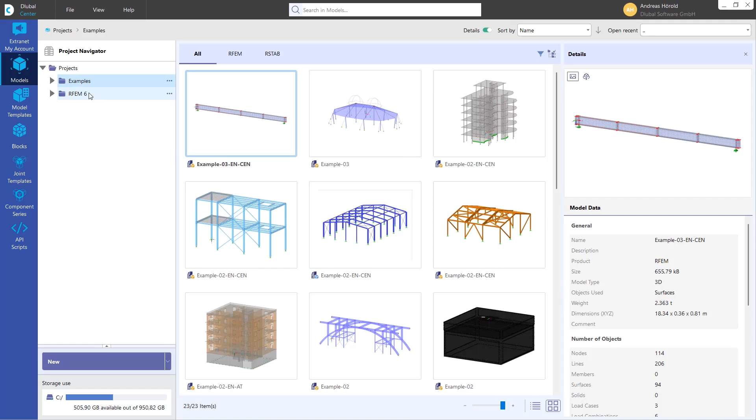People who already work with RFEM 6 know that. I would like to give you some tips and an overview of how you can work with the Dlubal Center, and news on what we've implemented in the Dlubal Center.

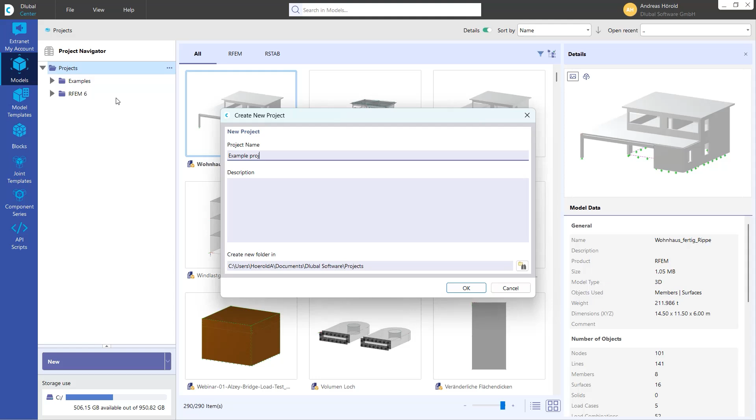Let's start with the models, the most important tool in the Dlubal Center to organize your projects. Let's create a new project with a right click to projects, then create new project. Let's call it example project. Okay, that's the new project.

I would like to create a sub-project. Again, right-click to example project, then create new project, and the new project should be model house 1. I can add a description here if I want.

Again, a right-click to model house, and I create a new file, RFEM model in that case, and I call it house variant 1.

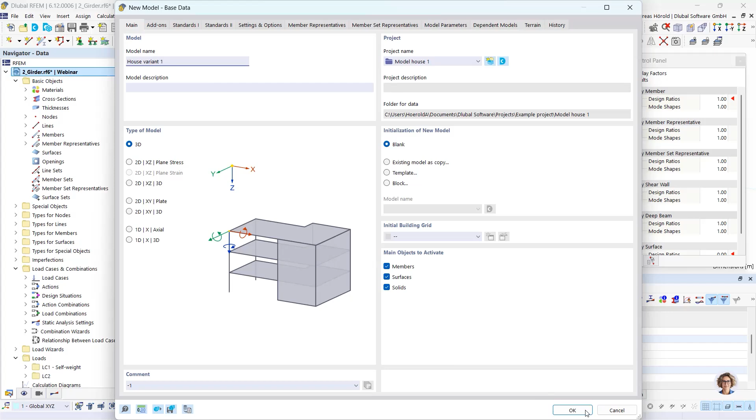Turn back to the Dlubal Center. Then you can see the file here. If you switch to the list view, you can add different columns here. For example, created in version, created by user, or I can remove them with a double click, and can add used add-ons, modified by company, or created by company as you want. Different types are available, and now you can see the added columns here.

Then I can open, for example for the example project, with a right click, the folder location, and the Windows Explorer opens. I can create a new folder also here. So with a right click, new folder, and I call it model house 2. I'll decrease it a little bit so we can see both.

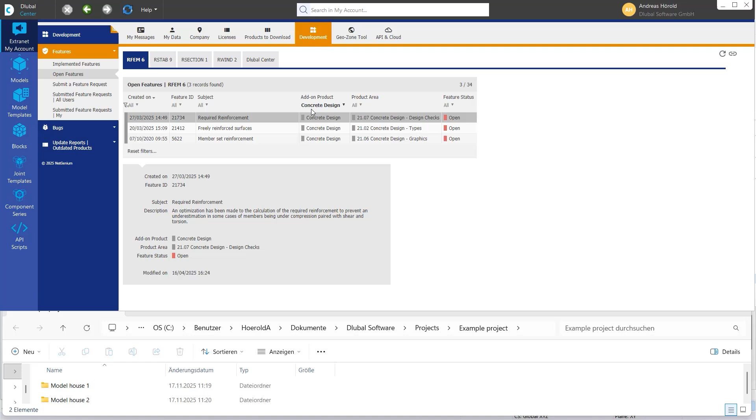Let's turn to the extranet and my account. You can see the extranet messages here, or what's quite important, the development. You can see implemented features in a certain add-on, for example, or you can select all to see all implemented features. You can see open features for certain products or all products, then submit a feature request, and maybe it will be implemented in the future.

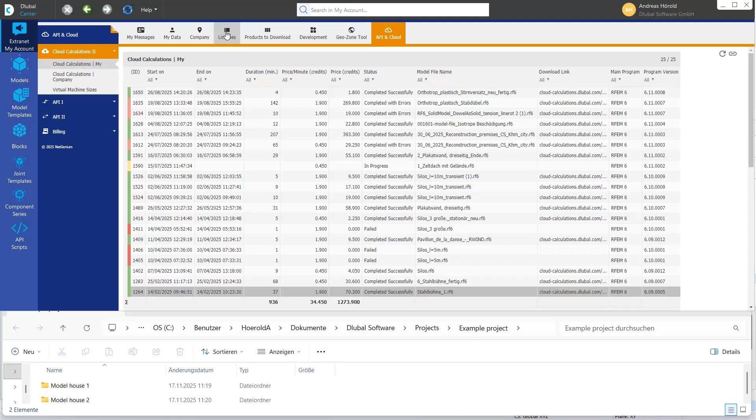For example, you can see the GeoZone tool requests - those are my requests in the past. Then the API and cloud - those are calculations from my side from the past. Then you can see here the data of you and of the company, your licenses, and so on.

Then we turn to the model templates. The model templates category in the Dlubal Center provides an overview of the models you have saved as template files. In my case, it's empty. An important message: the save as template function in the file menu in RFEM allows you to save your current model as a template.

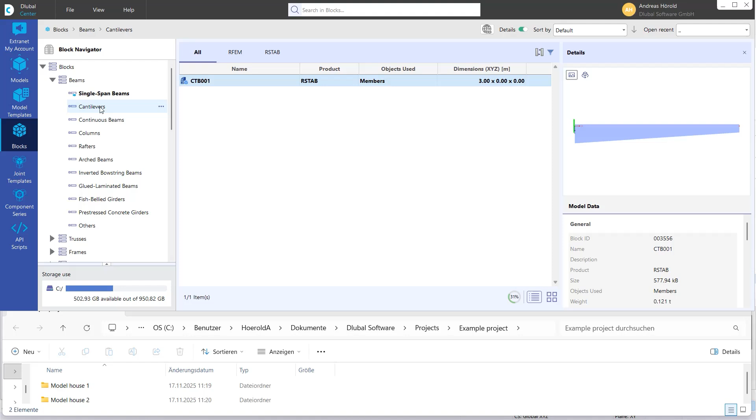Then you can see the blocks. Those are parameterized, and most of the models have parameters implemented. Let's go to this view, the tiles.

Simple models and more complex models, for example curved surfaces and concrete structures - a lot of blocks are available. Just use them, that's quite easy to handle.

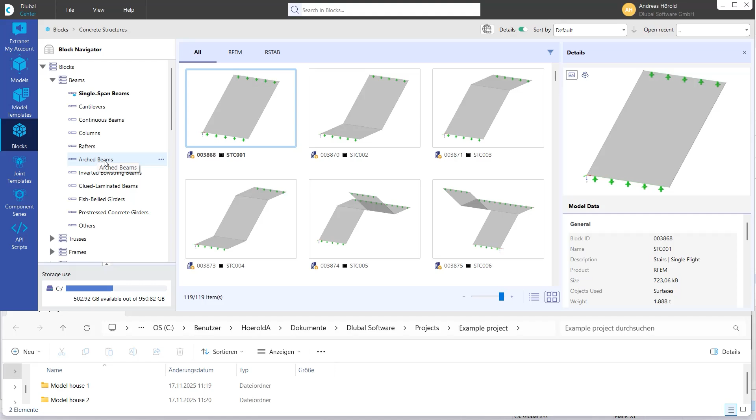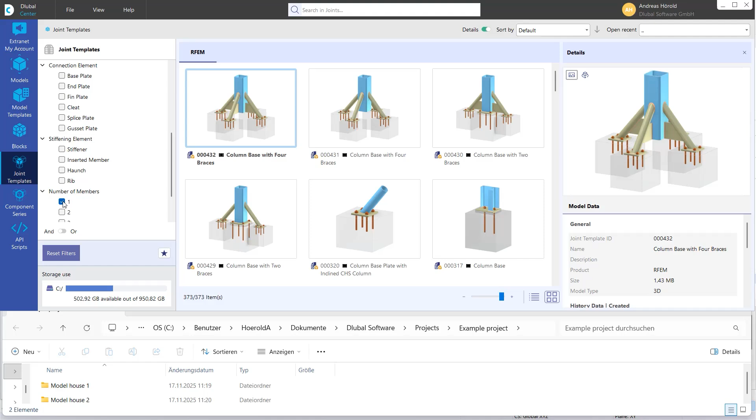Then the joint templates - you can select certain templates of joints. You can use it in the add-on, also in the steel joints add-on, for example number of members or joints with ribs, cleat, and so on.

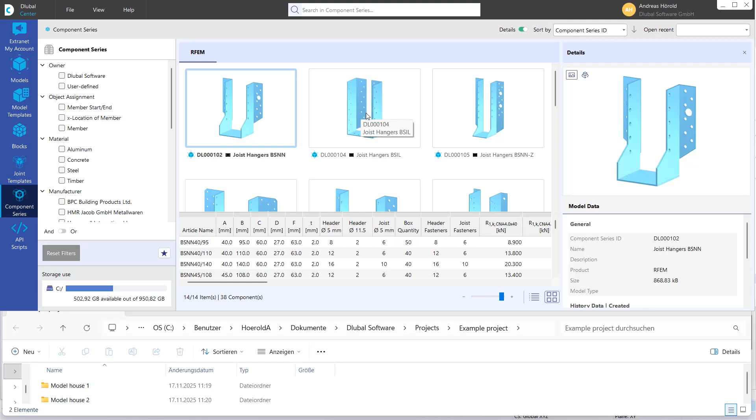Then that's a quite new part of the Dlubal Center, the component series. We are in the development of the new add-on components. It's currently in alpha version, meaning it's in preparation, and in the future you can use the values of such joints and compare them - you can compare your internal forces with the maximum forces of the joint.

And API scripts - there are already sample scripts that you can also use for your project. Okay, that should be all for this question. Let's turn back to RFEM.

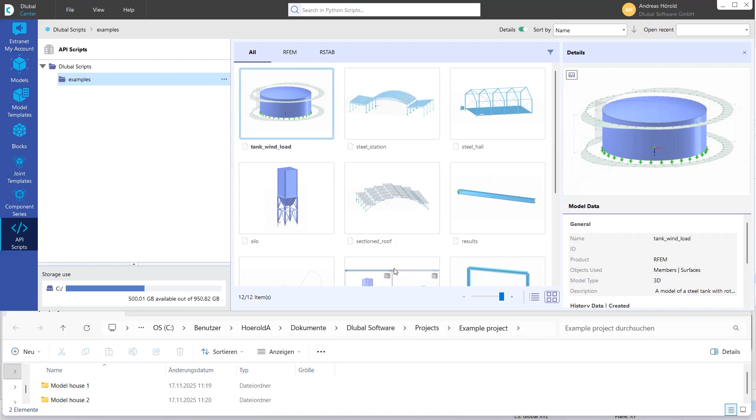The next question is: can I design longitudinal fillet welds according to Eurocode 3, part 1-8, in RFEM 6? Yes, that's possible now, soon we release that feature, and I can show you how to do that. I've prepared a simple single span beam here made of a cross section HE 180A.

Imagine you need to use a girder with a maximum height of 175 millimeters. It's not possible, as you can see on the design ratio, with the HE 180A, and it's also not possible with an HE 180B. That's why we create a welded cross section.

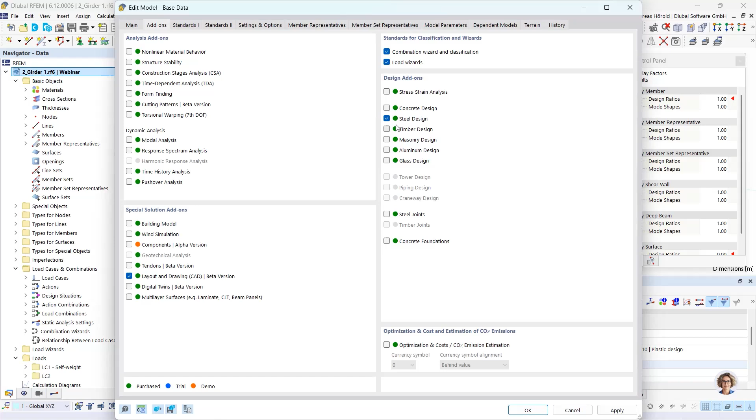At first, it's clear - I go back to the base data. It's necessary to activate the steel design for that feature. Then we create the welded section. I edit this used section. I turn to the library above and I select thin-walled I section.

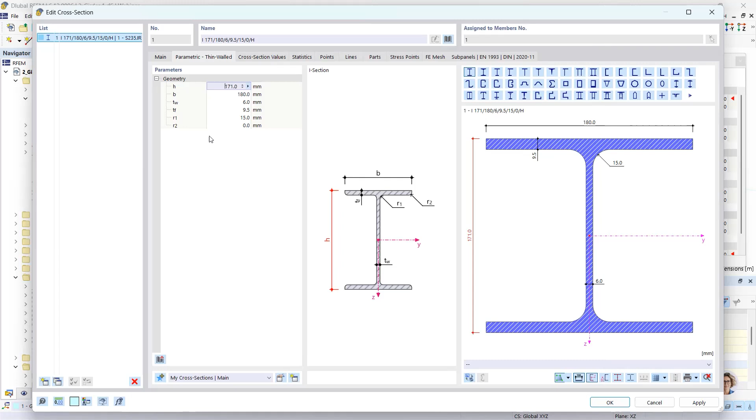Before I enter the geometry, I go back to the main section here and I select welded. Then I enter the parameters - maximum height should be 175 millimeters.

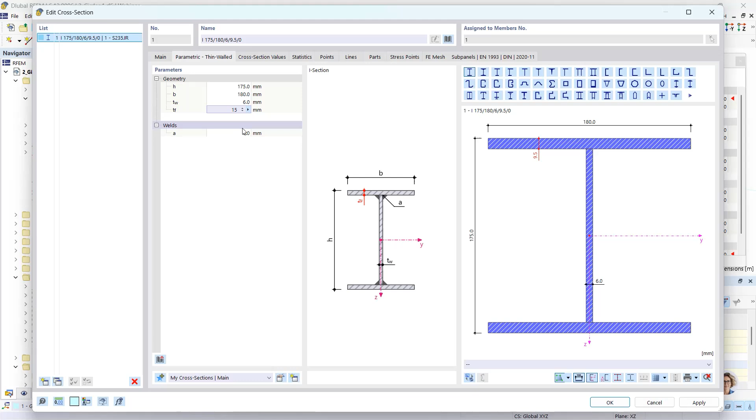Then the other values can remain, but not the thickness of the flange - should be 15 millimeters, and the weld should be 3 millimeters.

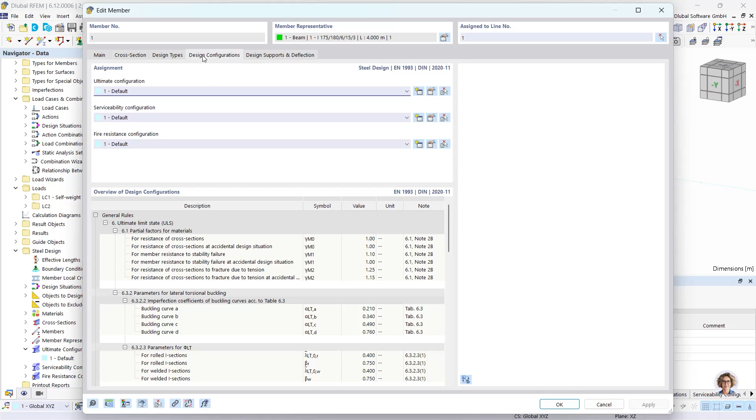Then I have to activate the weld design. I turn to the navigator data, then steel design and the ultimate configurations, default. I can turn to that chapter also when I use a double click on the beam. Then the design properties are activated and I can find the design configuration here, and I can edit it also with that button.

So then I have to activate the design of the longitudinal fillet welds. The correlation factor should be determined according to the Eurocode. It's dependent on the material, and in our case it should be 0.8 because we have material S235. If you want, you can also use a user-defined correlation factor.

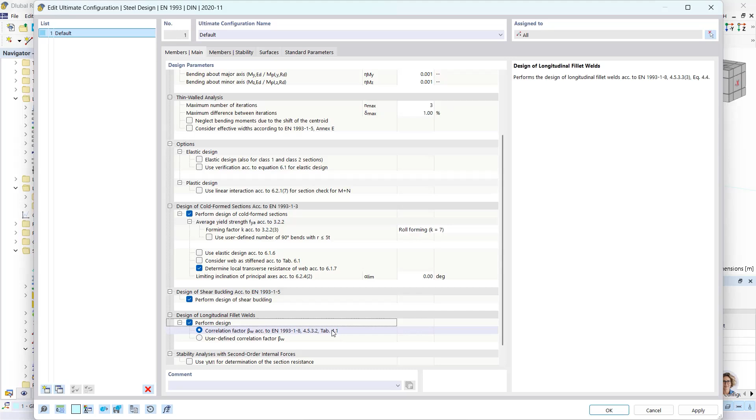In most cases we will use the automatic data determination according to Eurocode. Okay, so then I start the steel design again.

So the combinations are calculated in parallel. Let's turn to the design ratios on members. Yeah, and you can see there's an error.

If I double click on the line, the details are opened and you can see the throat thickness of one or more longitudinal fillet welds is smaller than the limit according to Eurocode 3.

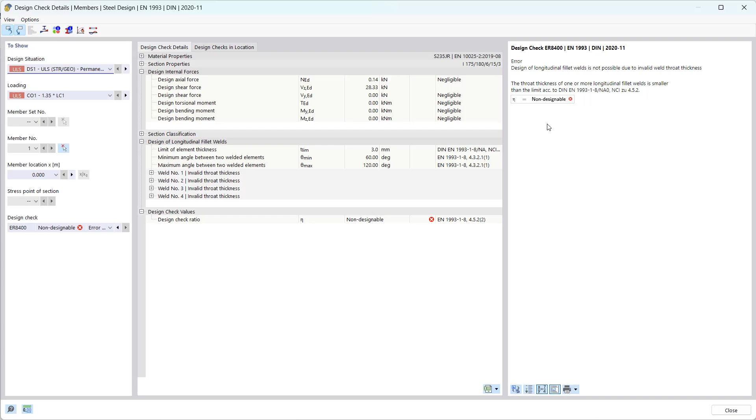Now the program checks that automatically. In that case, the weld is too small, and we need to increase the weld. So I turn back to the navigator data, double click on the cross section, and increase the weld to 4 millimeters. Then I run the steel design again.

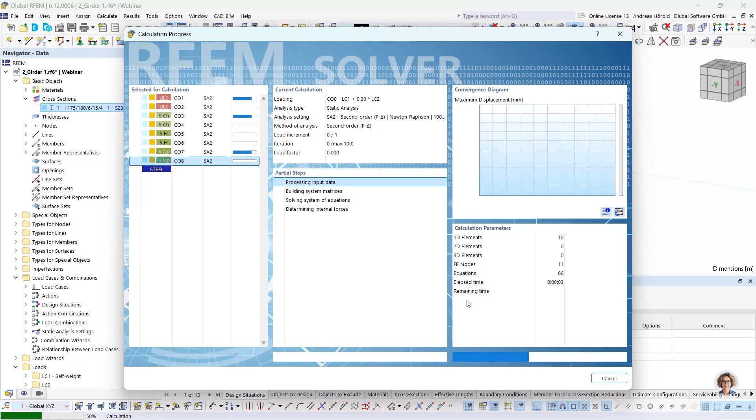So now the design of the weld is done. Double click on it and I can see the design checks. The 0.8 correlation factor can be found here, then the thickness of the weld, and the design check ratio is approximately 30%.

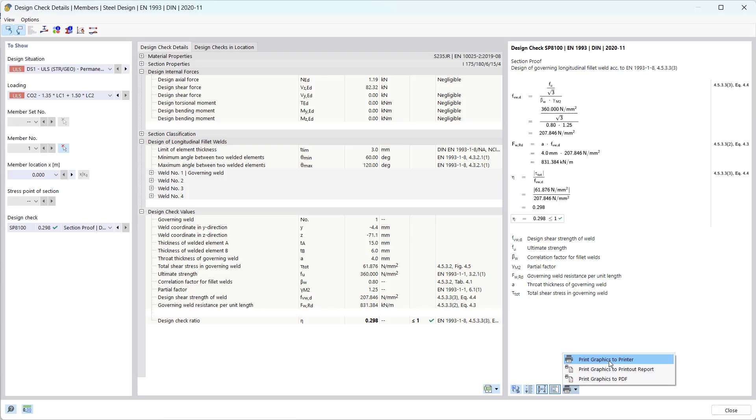And of course you can also print the formulas and so on to the printer or in the printout report. Okay, that should be all to this question and to this model.

The next question is: how can I smooth results in RFEM 6? That's an often asked question. You can do that with a surface results adjustment - in RFEM 5 we called it average region.

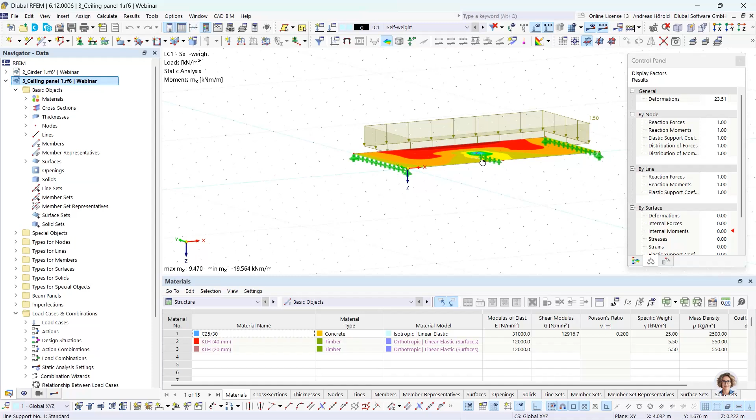Such a surface results adjustment describes an area in the model whose graphical results are not represented by the actual diagrams, but as mean values. You can use a user-defined adjustment area to evaluate the smoothed surface internal forces. You can see that ceiling panel here and a wall here.

Imagine it has a thickness of 20 centimeters, and you can see there are singularities at the end of the wall here. So we would like to use such a surface results adjustment to smooth the results.

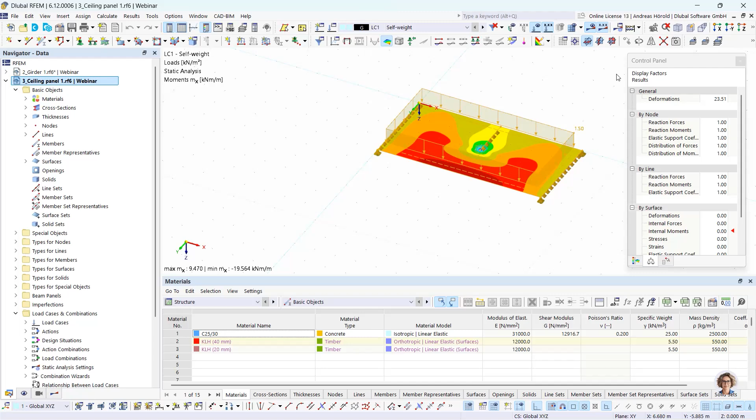So to compare the results, I copy that ceiling panel - select all, then use the move and copy function, create a copy, 6 meters in Y direction, including loading. Okay.

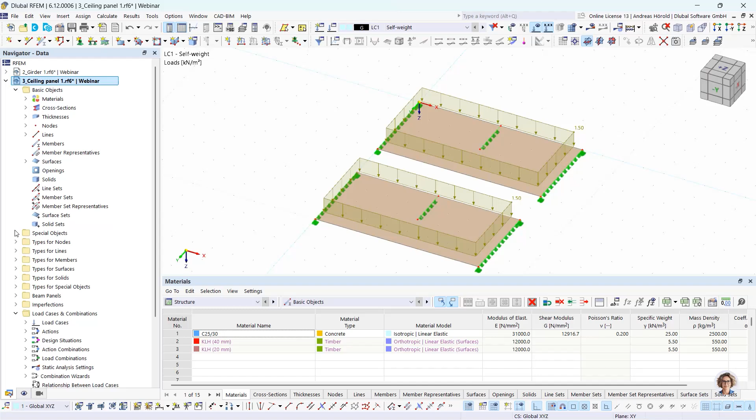So then I turn to the navigator data, and under special objects, you can find the surface results adjustment. You can also find them in the menu under Insert, Special Objects, Surface Results Adjustments, and I open the dialog box. At first, I have to assign a surface.

Then you can select different shapes here: rectangle, circle, ellipse, and polygon. I use rectangle. The dimensions in our case should be 20 by 20 centimeters, and I select the node.

To define the position correctly, I move it to 10 centimeters to depict the wall end correctly. There are different adjustment types. The default setting is for the direction U, averaging of mx, my, mxy, and so on - for basic internal forces in surface direction y. The second line is the default setting for basic internal forces in surface direction x.

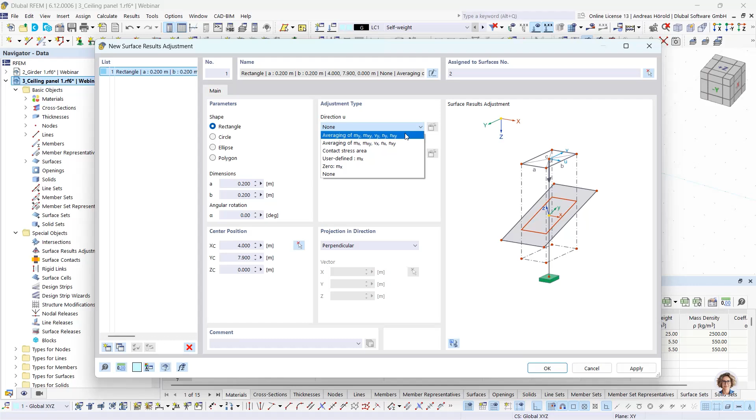So I use the default setting, press OK, and then we calculate all again.

Let's compare the internal forces for both slabs. The maximum value for both is 90.5 or minus 90.5 - the mx internal forces in that case.

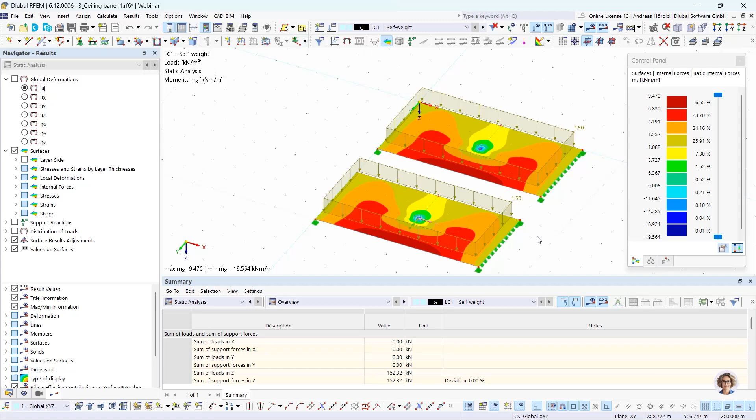If I want to see what the maximum value is here, I can deselect that slab and hide the selected objects. Now the maximum value is minus 16. That's the possibility to smooth results in RFEM 6.

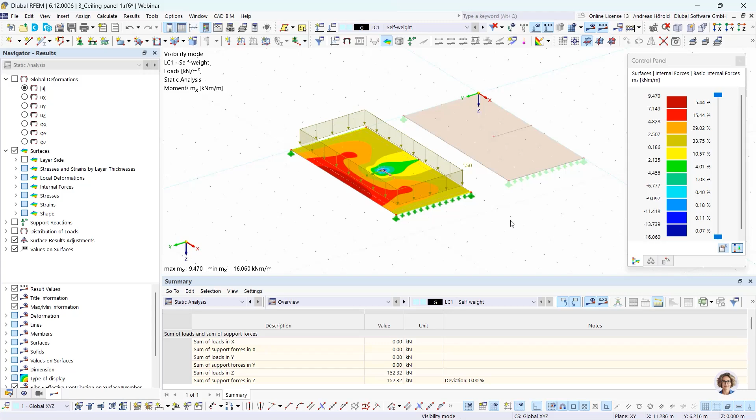Thank you, Andreas. I will continue with the next topic. The next question is: where can I find specific RWIND settings in RFEM 6.12 and later?

As you have maybe already realized, we changed the GUI in RFEM 6 a bit to be able to hand over more data to RWIND directly through the GUI, without stepping directly into RWIND. Let's start with the basics.

Usually at first you activate the add-on wind simulation, and you can choose the standard group for your wind profile in order to determine your automatic wind profile for your region.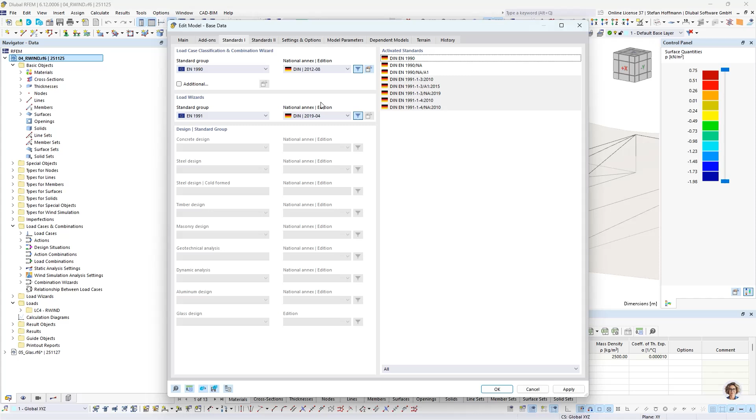If you're interested in adding a terrain to represent the location-specific behavior of the wind, maybe caused by trees or mountains, you can already activate a terrain in the base data terrain settings. You can choose between no terrain, a horizontal plane, an inclined plane, some table values, or - as I am using, and this is most likely also the first change - an IFC file.

Model objects are no longer found in the mesh settings to adjust the IFC as terrain - you now input it as base data in the terrain tab. So I'm simply using an IFC file where I've modeled a simple shape of my terrain, and you can do some more inputs on the size of your terrain already here.

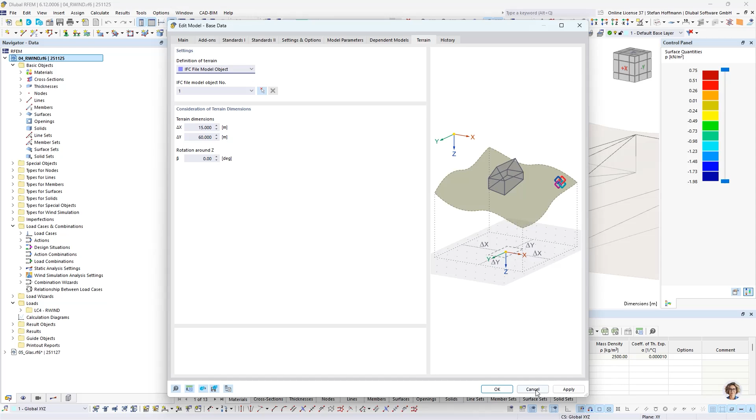If we jump into the model, in the mesh settings you have a tab for wind simulation, and for regular customers you'll realize this tab has changed a lot in the GUI. We moved some parts, and you now have the option to assign objects from shrink wrapping.

The shrink wrapping mesh, which is later necessary for the calculation in RWIND, needs to be assigned to your main structure or surrounding objects. You can already split it in over here, but later on also in the objects - this is currently not in use.

You can also choose to activate the terrain, which we set in the base data, to be considered for the calculation - you can jump into the base data there. You can moreover, as already known, adjust the level of detail for your members, and choose to close hollow sections.

You can consider a surface thickness in general, and the two known options to keep our wind results if the mesh is deleted, and/or to run RWIND in silent mode.

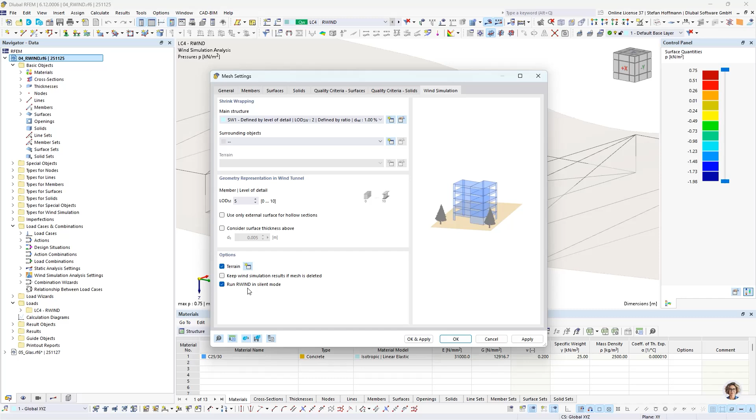As known, you also have settings in the load cases from the analysis type wind simulation. If we jump into the tab, this has not changed a lot - you can assign wind simulation analysis settings, where you can for example differ between steady flow and transient flow.

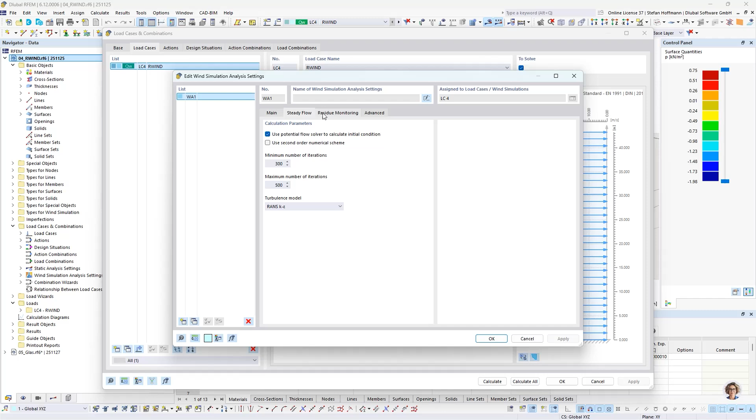You can hit some more options to be handed over to RWIND, and step into the tabs to add more input for the wind tunnel. The wind profile did not change from my point of view, so you can simply assign a wind profile according to a standard and hand this over to RWIND directly. Some more checkboxes at the bottom - everything is usually explained in more detail in our online manual.

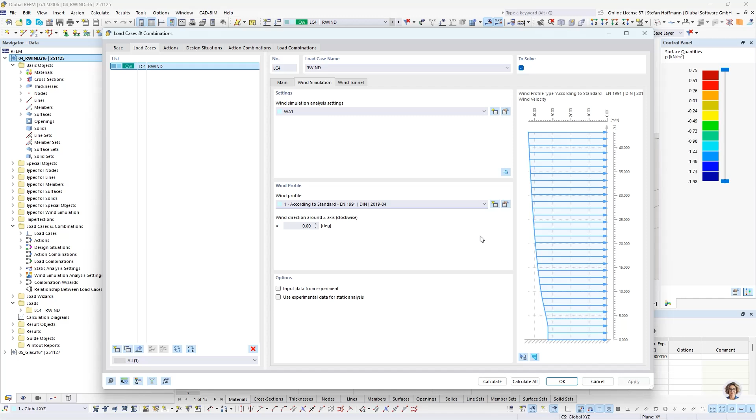The biggest change, in contrast to the mesh settings, is now that every object, if you click, for example, on one surface, has a specific wind simulation setting, which you can activate. And if you see this tab, you can see that you can now assign different shrink wrapping settings for surfaces.

So if you have maybe a small surface, you can assign an even finer mesh later on because you are interested maybe in facade engineering and some results on this point. And if you have a bigger surface, which is not of most interest, you can assign a coarser mesh. You can also define the roughness and permeability as an object.

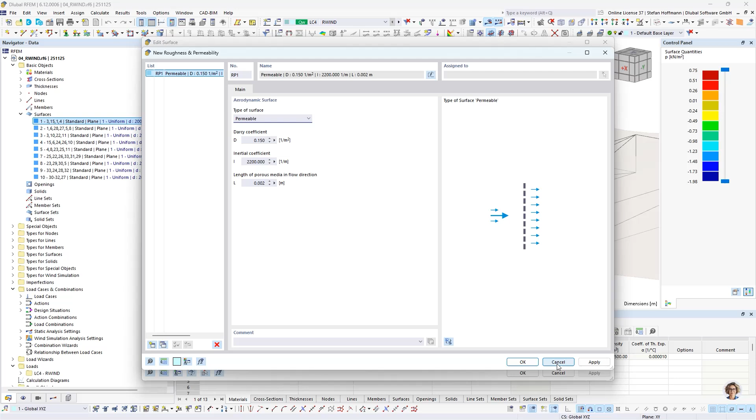So as you are maybe used to already in RWIND, you can use a closed surface and enter some permeable options for it, so that the mesh will not be fine, but it will be considered as permeability later on. You can also check on to consider surface thickness above, and another interesting option is that you can simply also exclude this object from the wind tunnel.

I think what we did not change is that you have, of course, your wind simulation analysis results, and you can still split to show it on the original model and/or the computational model.

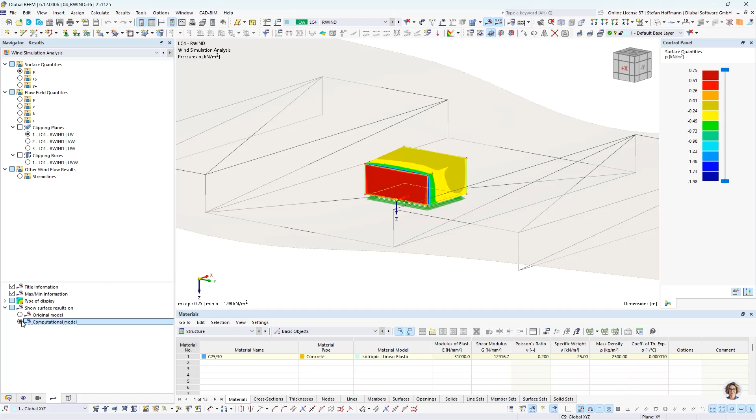We will step to the next question. The next question is, can I control the shear coupling for laminated glass in RFEM 6? So usually, of course, having laminated glass, the shear coupling is quite of interest, because if you have a layered plane where you have two panels of glass and one foil in the middle, then one worst case is that you do not take the shear coupling into

account, having big deformations, having stresses only in the glass panes, but it might also be of interest. That is why we use laminated glass, that you can take into consideration the shear coupling. Sometimes you are allowed to do this. And just with regards to the German standard DIN 18008-1,

it offers two requirements in chapter 7.2.1. It mentions when determining the stress and deformation of laminated glass and laminated safety glass, favorable shear coupling between the individual panes must not be assumed. But in the next chapter, 7.2.2, in the case of an unfavorable shear coupling, e.g. in the case of restrained stresses, full shear coupling must be assumed.

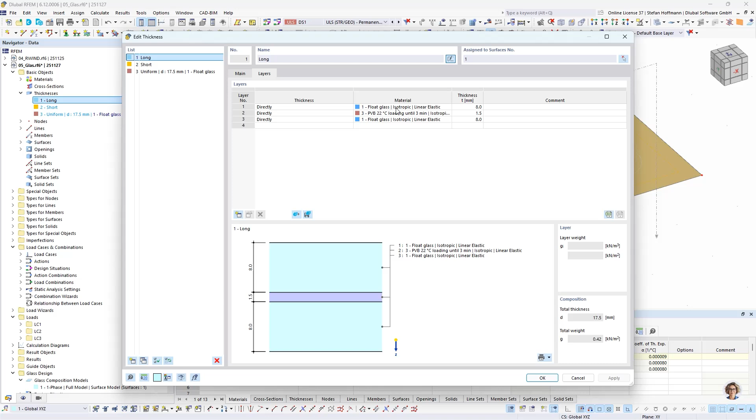So first, a quick look at our model. It's a glass pane with 4 point supports, and I have created a thickness from the type glass composition. I have 3 layers, 2 times float glass, 8 millimeters, and 1 foil in the middle. You can use the foil, of course, with material values from our material library.

I'm using a foil with a load under 3 minutes, so the E modulus will already change for our foil layer. And this is my glass composition. For the calculation, you have to assign, or it usually automatically assigns the first one, a glass composition model, where you can later on also choose a solid model, where you can then take into account also insulated glazing.

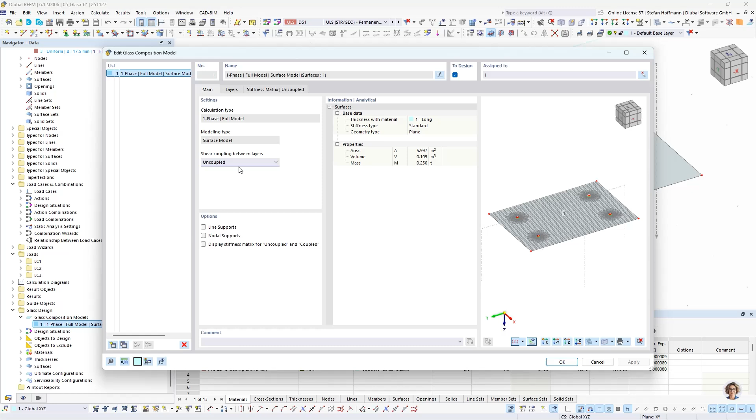But currently you can differ between coupled and uncoupled shear coupling between the glass layers. So I have defined uncoupled, so there is no shear coupling in my main model. So how to consider both shear couplings? It's quite easy in RFEM 6. So we do this checking our design situations.

And once you check glass design, you can see a further added option at the bottom in the design situations. It mentions inverse shear coupling between layers for surfaces with glass compositions. So let's remember, we have a glass composition model without shear coupling. So for every load combination in design situation 1, if we do not check this checkbox, this is uncoupled.

And we can simply copy this design situation and check this checkbox for the same load combinations, where we will then take into consideration the full shear coupling. Just by simply adding an option, load combinations will be calculated automatically.

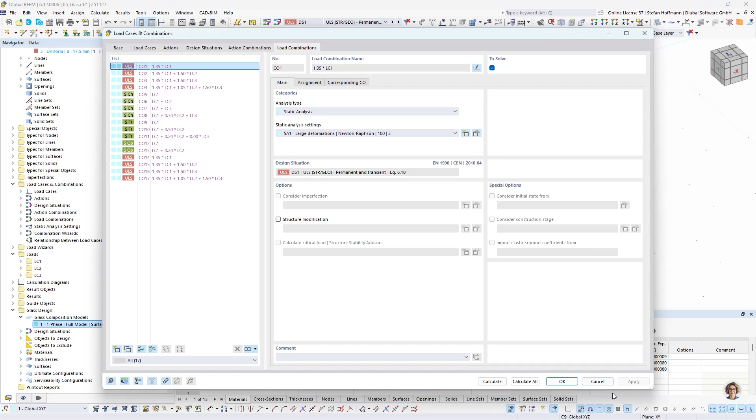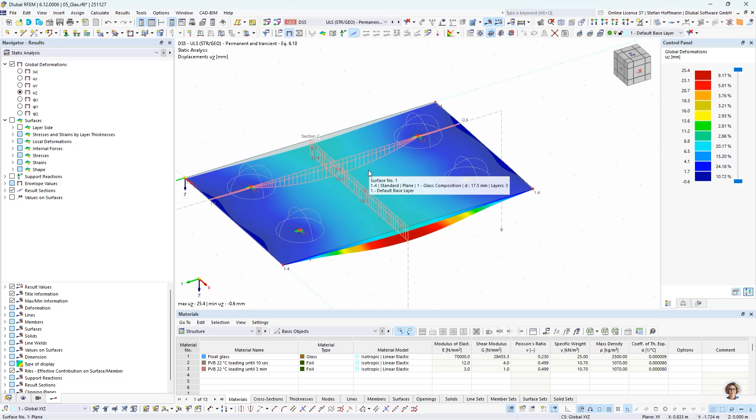So once we step quickly into our design situation 1, no shear coupling, we have a maximum deformation of 50 millimeters approximately. And if we step into the one with full shear coupling, the deformation, of course, reduces as expected, related to the theory behind for our 2D stiffness. And I think the most interesting part is, of course, then later on the glass design.

I have done 2 sections through the model, and we are, of course, above our design ratio, so we would have to adjust our model, but mainly not taking into consideration the shear coupling, we would expect on point supports to have the biggest ratio in the middle of the field, but this would decrease once we can take into consideration the shear coupling.

But this usually affects, most likely, our support points with the point supports, in that the stress ratio may increase. So it's not only in the case of restrained stresses; from my understanding and experience, you can also expect that the stresses may increase with full shear coupling at the place of point supports. You can take this into consideration by simply activating this option in the design situation.

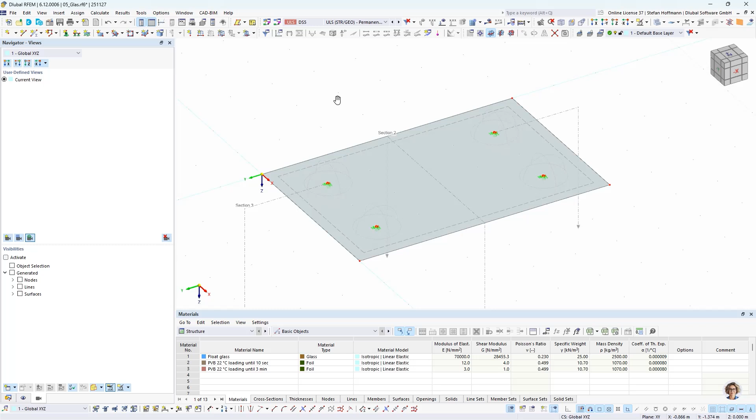Let's step to the last question for today. We will stay in the model. The last question is: my mouse is not working as usual, what can I do? Let's reflect on the mouse function. With the left mouse, you can select items. With the mouse wheel, pressing it down, you can pan. With the right mouse, you usually get a context menu with some options. If you hit Control on the keyboard and press the middle mouse button, then you can rotate.

If you select a node or object beforehand, hit the Alt key and press the middle mouse button, you can rotate around that object. And of course you can move with the middle mouse. And what happens if you only have a mouse with one key, or if you are sitting at your laptop where you do not have a middle mouse button? We introduced this option here to move, zoom, rotate. If you activate this, the mouse action will change.

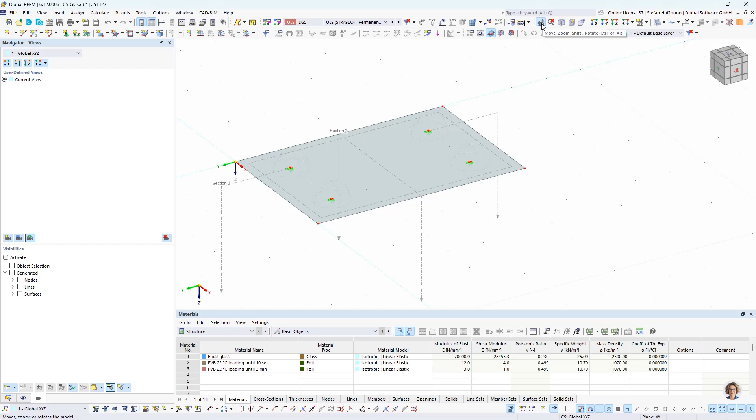So with the left mouse clicking, you can move. Holding Shift, you can zoom by moving the mouse and clicking the left mouse button. And with Control or Alt, you can rotate by simply clicking the left mouse button. So if you would like to select something and it's not working, just remember that this option might be active. It also affects the view cube, so it's not fully functioning anymore. So if you are a bit confused, remember this option, uncheck it, and then you have your normal mouse options back again.

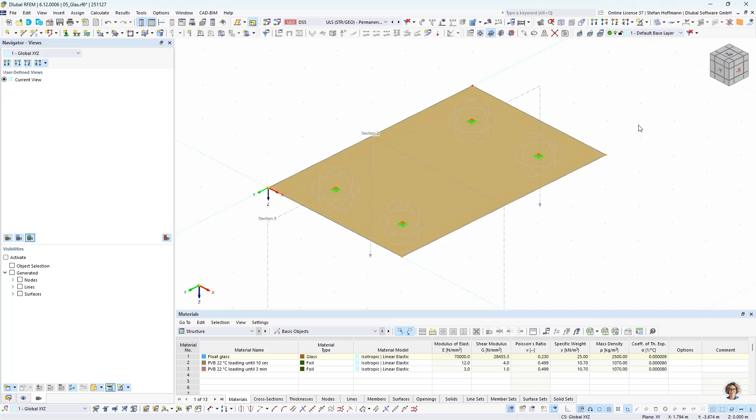What I would like to add is the function here to add something to the selection or create a new selection. Usually you can mark the surface, hit the Control key, and add more objects to the selection. But if you do not want to do this, you can check this button and click objects one after another. But this may cause trouble if you do not remember you activated it, because then a left click will not undo the selection. You have to press Escape.

The last two buttons I would like to add to this topic are these two. Both allow you to interact with the model and the table. As we had in the glass design, if you have results and you click in one row, you will see a red arrow pointing at the place. If this is not the case, or if you click on one node and it is not highlighted in the table, then simply remember both buttons; they should be the reason why it is not highlighted, and vice versa.